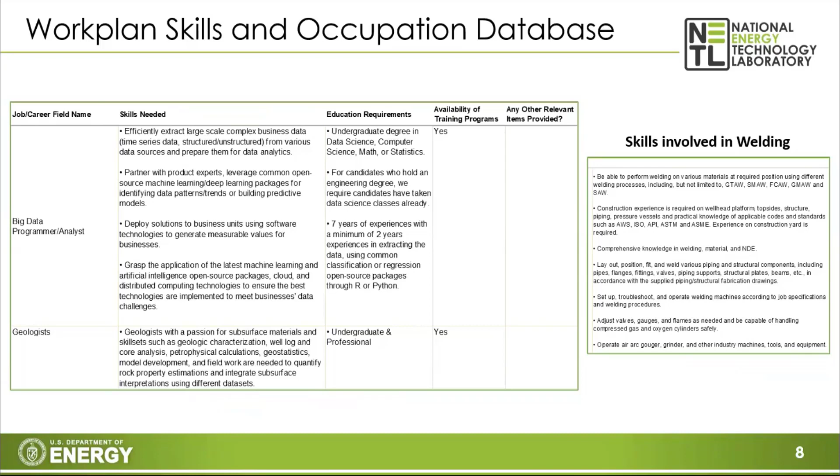Going forward, we think this type of work with this project across the labs could be really beneficial, especially for the academia sector, when you think of solar, wind, hydrogen. So we don't want to do this just from NETL—we would love to implement this across the labs. Once I can take this final technical report and start pitching this to all the different labs, I think this is something that would be like the next phase we'd like to try to implement across all the labs.

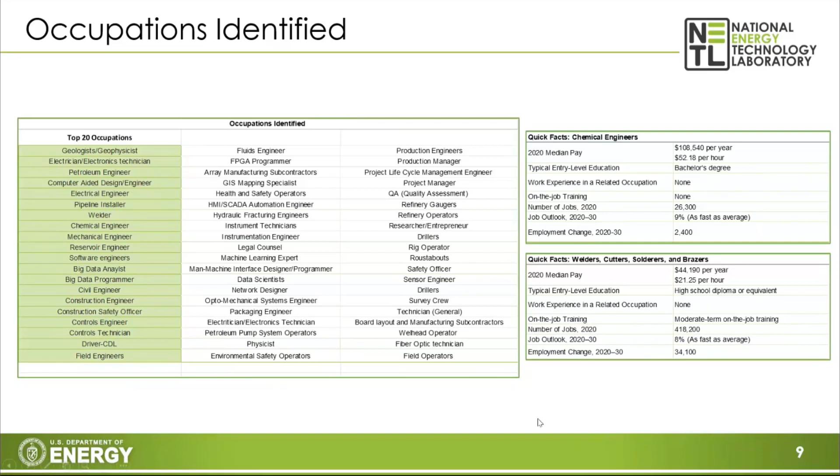The advanced skills are really something that's picking up. Construction industry, electricity generation, all of this type of thing, they're looking for advanced skills, and that's what we're finding from this pilot.

Next slide. So just to summarize, I want to pass it on here soon to Nate to get talking about hydrogen, but I'm really excited about this pilot we did because we're finding a lot of good information. Again, the skilled technical workforce is a big piece of the high-tech workforce in the future, not only now, but really in the next 3 to 5 years.

Technical workforce occupations are very in demand, and there's a misconception because they're pretty good paying jobs. We're seeing that when you look at all these Bureau of Labor Statistics numbers, when you go look at these skilled positions, 20, 30, 40 bucks an hour, good money out there for these. I don't know that a lot of the younger generation realizes that today. So that's really just the gist of it that I want to talk about.

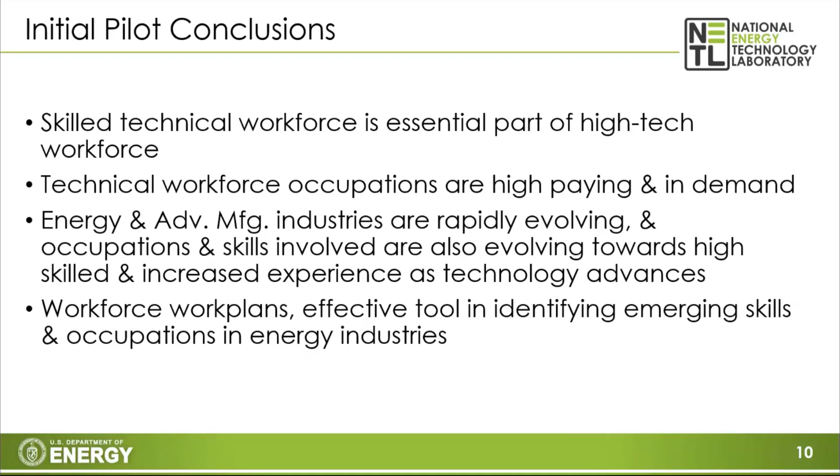All right, thanks Anthony for that great wrap around for Energy 101 and RWFI and the IWG. Again, my name's Nate Weiland, I'm Senior Fellow at NETL. As Anthony was discussing, NETL is both a research organization and also funds a lot of external research for folks. I sit on the research side of things, but I'm here to talk to you today about some of the basics of hydrogen, some of the research going on at NETL, and then I'll also talk about the various types of activities going on within the federal government surrounding hydrogen recently, hydrogen hubs, RFIs, etc. We'll get to talk about that towards the end here.

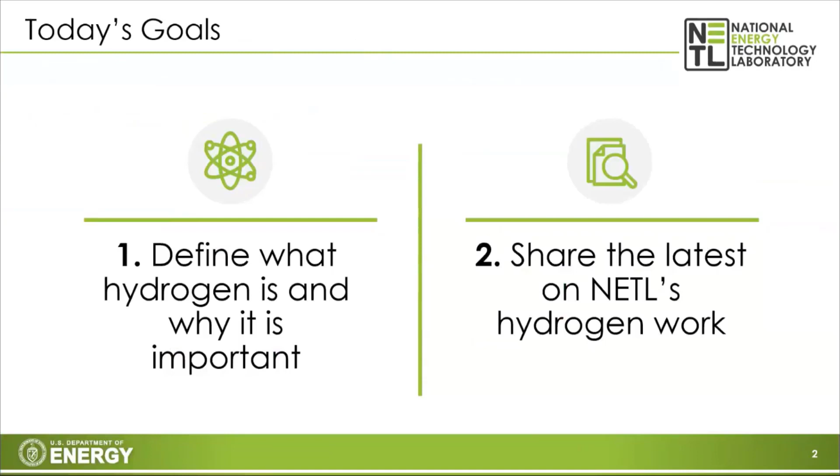So just to set the stage here with a quote from our Secretary of Energy, Granholm: 'We have the tools to put America on an irreversible path to achieve net zero carbon emissions by 2050.' For those who may have heard, the Biden administration has some very aggressive goals with regards to decarbonization. They're looking for a 50 to 52% reduction in economy-wide greenhouse gas pollution by 2030, and a carbon pollution-free electricity sector by 2035.

So not a lot of time to meet those goals. Included in that is addressing some environmental justice and job creation issues. We'll see that with some of the hydrogen hub and infrastructure bill actions that have been taken. And then kind of the ultimate goal is reaching a zero carbon economy by 2050.

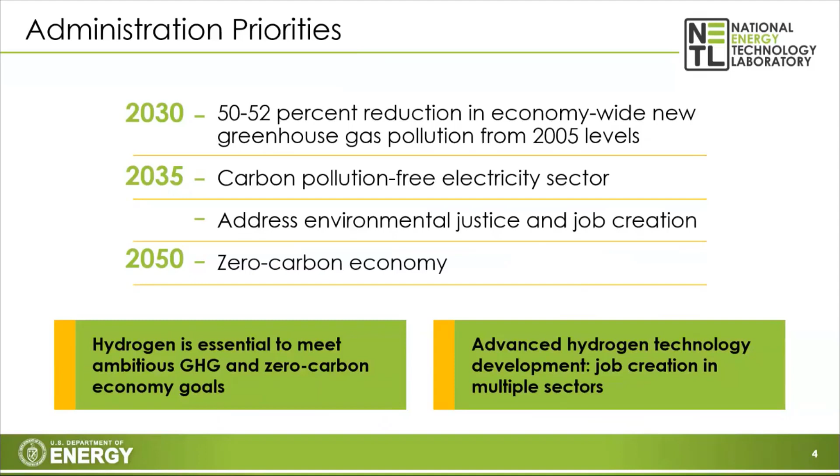Again, really aggressive. Would require an awful lot of infrastructure, an awful lot of new jobs and energy, which is why we're here today. So the hydrogen piece - hydrogen is essential to meeting some of those ambitious zero-carbon economy goals, in particular because it's very useful for decarbonizing some difficult to decarbonize sectors, and we'll get to that piece in a little bit as well.

We can, in particular, generate power again from that hydrogen. So as a way to offset, say, renewable power that's generated during the day, we generate hydrogen, and you can use that hydrogen to generate power at night or in the wintertime when we don't have as much wind or solar power. Hydrogen can be used in vehicles, can be used to help make synthetic fuels, help upgrade biomass

into oils and the like. It's also a primary component for fertilizer, ammonia in particular, which in itself is a carbon-free fuel. And we'll talk a little bit about that as well. Hydrogen can be used in metal refining and for other end uses.

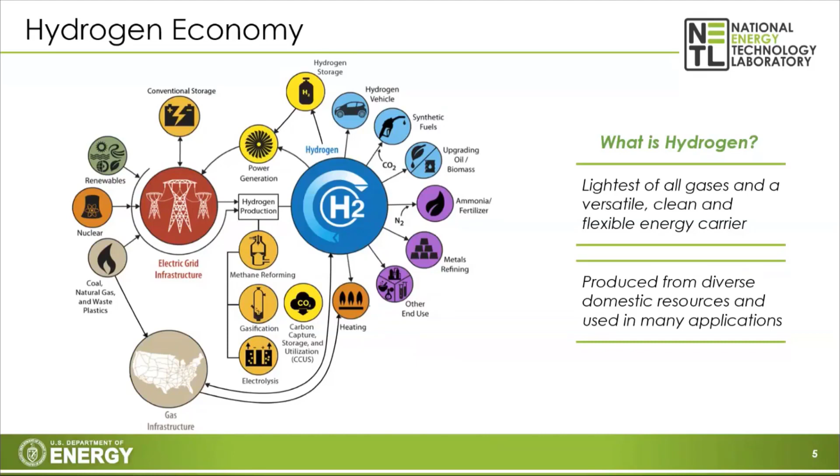And it's really kind of those blue and purple circles there that are where hydrogen is very useful in helping to decarbonize industries that really don't have a lot of alternatives for decarbonizing. So what is hydrogen? It's the lightest of all the gases, very versatile, very clean, and a flexible energy carrier, produced from a variety of domestic resources and usable as shown here in a lot of different applications.

So I'll note most of today's hydrogen comes from natural gas. It's about 75% of the world's hydrogen comes from natural gas currently. Most of the rest comes from gasification of coal, although a lot of that happens in China. But there are a lot of other options for generating hydrogen.

So solar and wind power to generate electricity certainly can use that electricity through an electrolysis process, essentially splitting water into hydrogen and oxygen to generate that hydrogen. Likewise, you can use nuclear power in much the same way, utilizing the electricity from nuclear power to generate hydrogen as well. There are a few other processes that are very specific in terms of geothermal or biomass-oriented processes to make hydrogen as well.

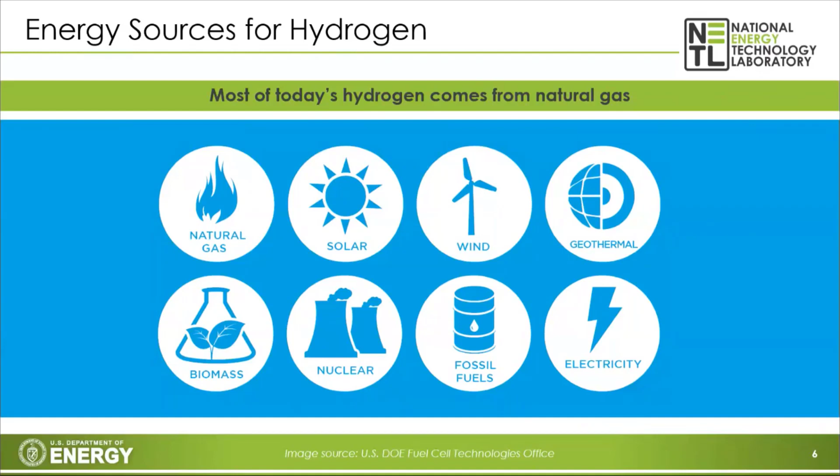So other options - I've already mentioned gasification, mostly a conversion of solid feedstocks like coal. We could also utilize biomass or even waste plastics to help generate hydrogen through a gasification process. And then, as I've mentioned, electrolysis processes again take electricity to split water into oxygen and hydrogen. I also mentioned direct solar water splitting, where that sunlight can be used to help heat water molecules and split it again into hydrogen and oxygen.

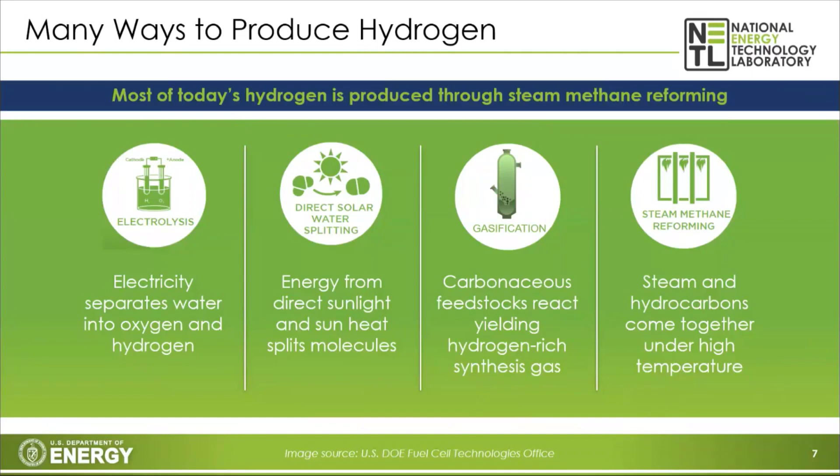So finally, I've already mentioned this can be used in a lot of different sectors. Fuel cell vehicles - there are a number of light duty electric vehicles running on hydrogen, primarily in California. I think the industry is recognizing that battery electric vehicles are probably a better fit or a better option for consumer or light duty electric vehicles. However, for heavy duty vehicles, hydrogen is a much better source because you're able to refuel much quicker rather than waiting for a battery to charge, for instance.

So in sectors like heavy duty trucking, rail, and even in some cases shipping or aviation, hydrogen might be a better fuel here. Hydrogen is good as an energy storage medium - as I mentioned, the sun doesn't always shine, the wind doesn't always blow, so you do need to store that energy. There are batteries for short duration storage currently, but hydrogen is looked at as a viable or very good option for long duration energy storage on the order of weeks to months.

So, I've already mentioned fuel cells. There's a lot of interest from cell towers, data centers, hospitals, supermarkets, people looking for backup power, where hydrogen fuel cells can provide not only a steady source of power, but a very reliable source of power.

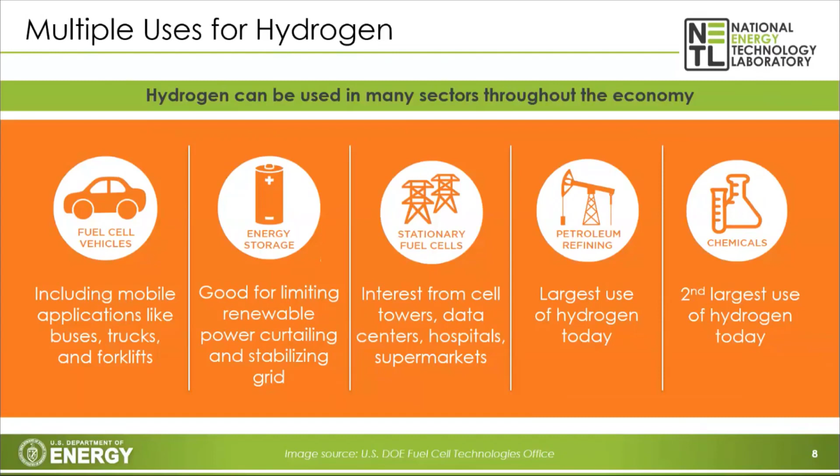Hydrogen is great, does a lot of different things, but it does have a couple of challenges that we need to overcome, and hence the need for a research program and a national strategy on how to fix that.

Energy density is one of its biggest challenges. On the left-hand side, you can see, on a unit weight basis, hydrogen's about 3 times more energy content by mass than gasoline, diesel, or even natural gas. However, it's a very, very light substance, so on a volume basis, it has about 4 times less energy content than gasoline. So if you're looking at a vehicle with a specific size tank to hold your fuel, you need a 4 times larger tank to carry the same amount of fuel energy utilizing hydrogen. So that is one of the primary challenges.

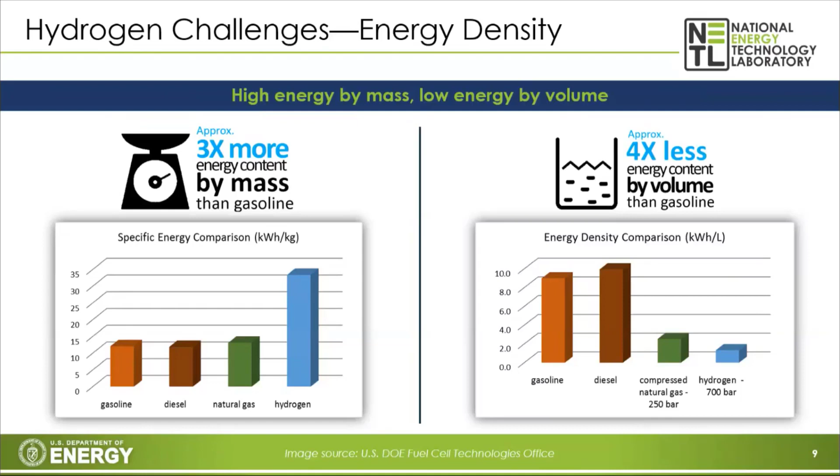Another big challenge is economics. Clean hydrogen is really expensive currently, but there are some research programs going on now to bring those costs down. We have natural gas and coal, which are really the primary production technologies for hydrogen right now. About 2% of the world's hydrogen is made from biomass and electrolysis from electricity produced through nuclear, solar, or wind processes. So not a lot right now, but certainly need to increase those numbers.

Hydrogen production costs, you can see on the right here. You'll notice SMR, steam methane reforming, which I've mentioned already, and I'll note as well the CCS is with or without carbon capture and storage. The main goal here is to decarbonize. In this case, you're taking methane, reacting that with water to generate hydrogen and carbon dioxide. That carbon dioxide is captured and stored typically in underground reservoirs, which tends to add a fair amount to the cost. So you're seeing costs here with and without carbon capture and storage, or CCS, for both SMR and coal gasification.

I'll note that this particular slide utilizes cost figures from Europe, where they tend to have higher natural gas costs than in the United States. Actually in the U.S., the top two, steam methane reforming, has a better hydrogen cost profile than coal gasification, with or without CCS.

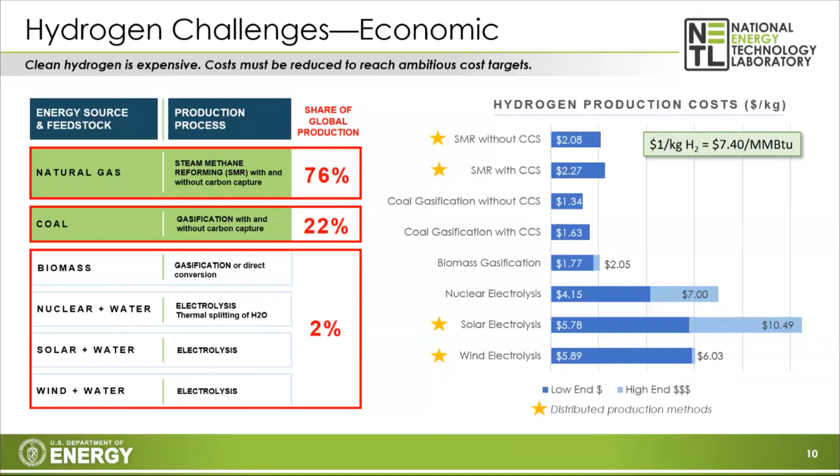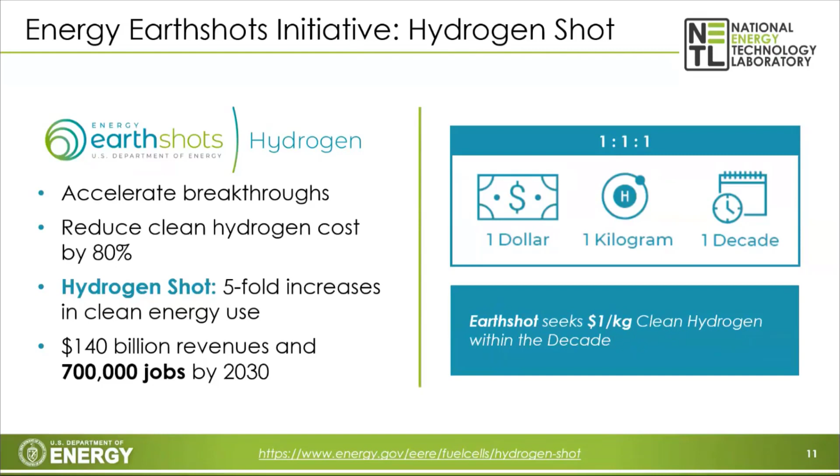The Department of Energy has started an Energy Earthshot, sort of like a take-off on the moonshot from the 60s to get us to the moon. The first Energy Earthshot was based on hydrogen, with the main goal being to produce $1 per kilogram clean hydrogen within one decade. That's going to require about a 5-fold increase in clean energy use and reduction in clean hydrogen costs by 80%, at least on the electrolyzer side. Cost reductions are lower for fossil fuel technologies, but still have a ways to go there as well. In reaching this goal, we're expecting about $140 billion in revenues to come out of the new hydrogen industry, with about 700,000 jobs created by 2030.

Another quote here from Jennifer Wilcox. She is the Acting Assistant Secretary for the U.S. Office of Fossil Energy and Carbon Management. Sourcing low carbon hydrogen will be critical to producing fuels and chemicals with CO2 as a feedstock, and there's potential for applying carbon capture to help advance a low cost and low carbon hydrogen economy.

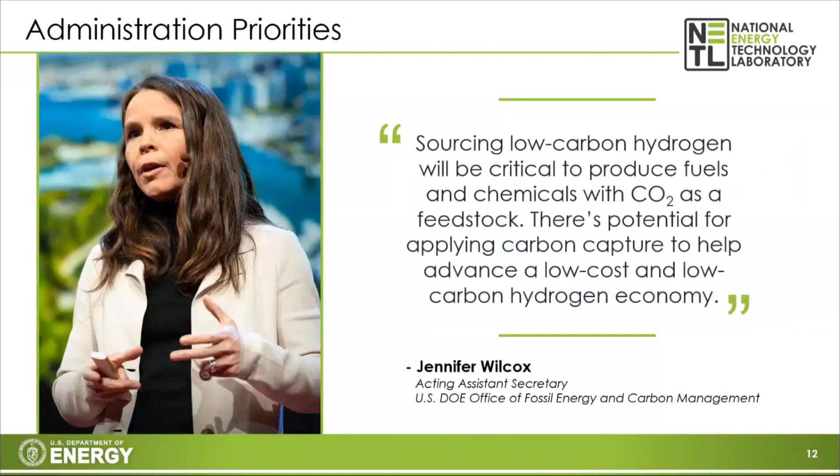So that's what we're doing at NETL. Our main role is working with the Office of Fossil Energy and Carbon Management, although we do work in some regards with other agencies as well. But being the primary fossil energy laboratory, it's kind of incumbent on us to enable this rapid and cost-effective transition to a hydrogen economy. As I've mentioned, we've already got many decades of research in carbon capture and storage, as well as a lot of work on fossil fuel large-scale production, infrastructure, power systems, et cetera. And of course, we do a lot of R&D to help on hydrogen, which I'll show in a minute, across the entirety of the hydrogen value chain.

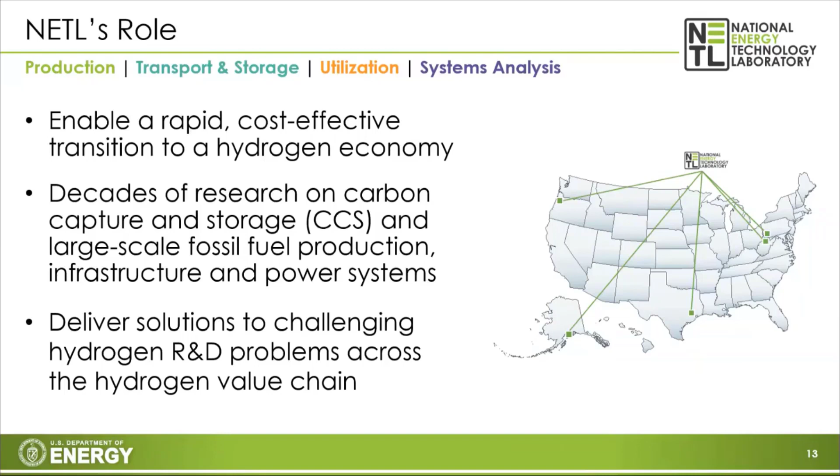There is another route that I'll talk about briefly: natural gas pyrolysis, essentially heating up natural gas in the absence of oxygen to create hydrogen and solid carbon co-products. Really interesting technology, which we're also working on. But once that hydrogen's produced, it really doesn't matter if it's blue or green—it's just where it comes from.

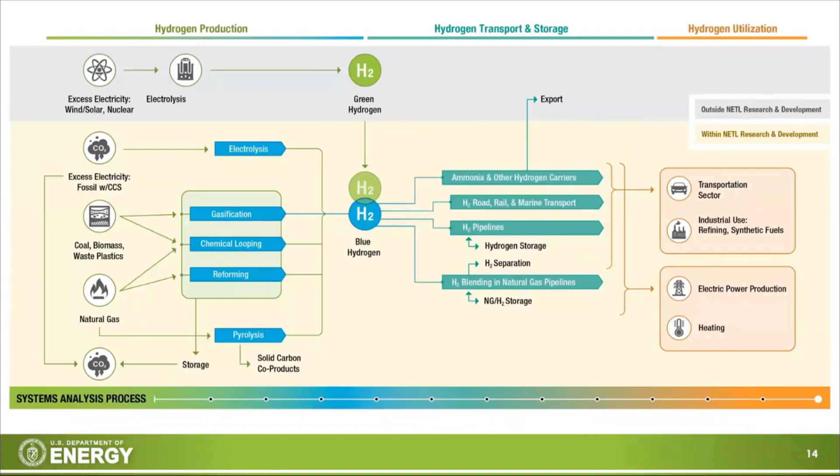One other item is you can take that hydrogen and convert it into ammonia or other hydrogen carriers to more easily transport it. Finally, whether that's in the form of ammonia, hydrogen, or a blended hydrogen and natural gas mixture, how do we utilize that hydrogen in the transport sector for industrial use, refining, making synthetic fuels, et cetera, power production, heating, et cetera? So I'll get into a little bit of our work in each of these segments in the coming slides.

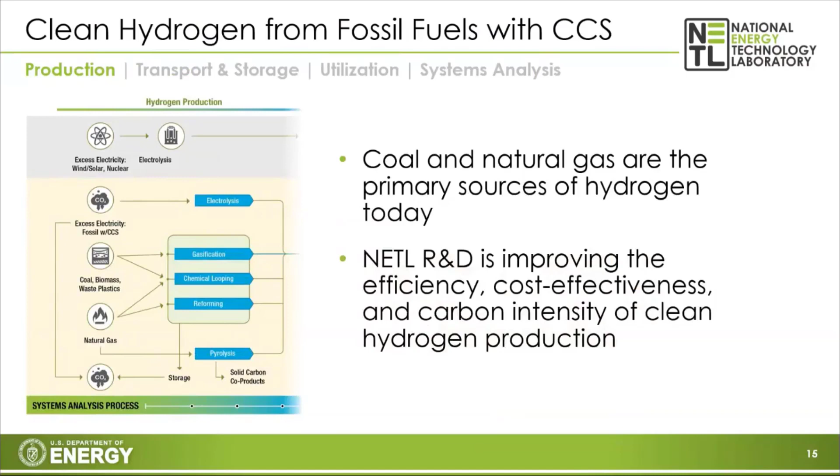So first, starting off with production. As I mentioned already, coal and natural gas are really our primary sources of hydrogen today, and the work that we do is really working on improving the efficiency and cost effectiveness of that clean hydrogen production, again trying to incorporate the carbon capture and storage pieces to reduce its carbon intensity. We're doing that in a number of ways. Just to give a couple of examples of the types of work we're doing at NETL in terms of research, we are looking at some advanced natural gas reforming technologies.

The one on the left actually utilizes microwaves to assist in that reforming process to move you from methane to hydrogen through a number of different routes.

I've mentioned already that electrolysis can be used. There are a couple of different types of electrolysis. Solid oxide electrolysis cells, or SOECs, are something we have a lot of expertise on within NETL, similar to a solid oxide fuel cell. They're higher temperature fuel cells and therefore more efficient electrolyzers than some of the lower temperature cells currently in production.

Note that we've also done a lot of work on multi-phase reforming and gasification with some inherent carbon capture systems. I mentioned the chemical looping systems already, and the methane pyrolysis for hydrogen and solid carbon co-products, where you can make nanofibers, nanotubes, nanosprings, graphene, carbon black that's used in rubber tires, and a lot of different things. So it avoids the need to make CO2 and then store that underground.

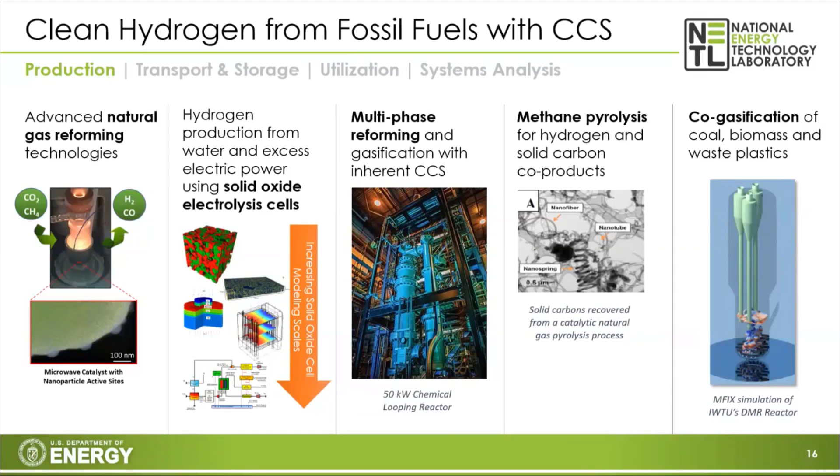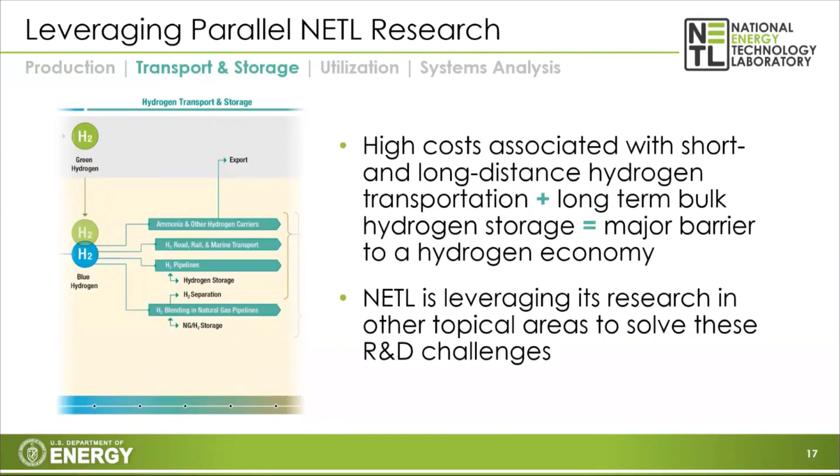I'll note that we're leveraging a lot of our parallel research in transport and storage aspects to improve hydrogen transportation costs. Transporting bulk hydrogen long distance really creates a major barrier to a hydrogen economy, because that's costly due to its low density. But because of our work in natural gas infrastructure, we're able to leverage some work to solve some of the R&D challenges there. I've mentioned the ammonia production already, as a potential hydrogen carrier.

We have a novel microwave-based ammonia production process. It's a really fabulous technology. It's a shift from the large-scale, high-temperature, high-pressure ammonia production plants to something done at atmospheric pressure with a microwave, so that can really help you modularize and shrink the size of that ammonia production process, such that it's usable at the base of a wind turbine or at a solar farm level.

We're also working on hydrogen carriers. There are a lot of different types of hydrogen carriers. On the slide shown here, we have some microporous carbons generated from coal, where the hydrogen penetrates into the pores of that coal structure, adsorbs onto the surface, and is used to improve the storage capacity for hydrogen transportation. We do a lot of fundamental materials research, not only for hydrogen material compatibility, but also materials for separations of, say, hydrogen and carbon dioxide.

Using some of those similar materials and technologies, a lot of that goes into sensors for real-time hydrogen safety, pipeline monitoring, and monitoring of plants, for instance. We have a suite of sensor technologies for that, which I won't get into today.

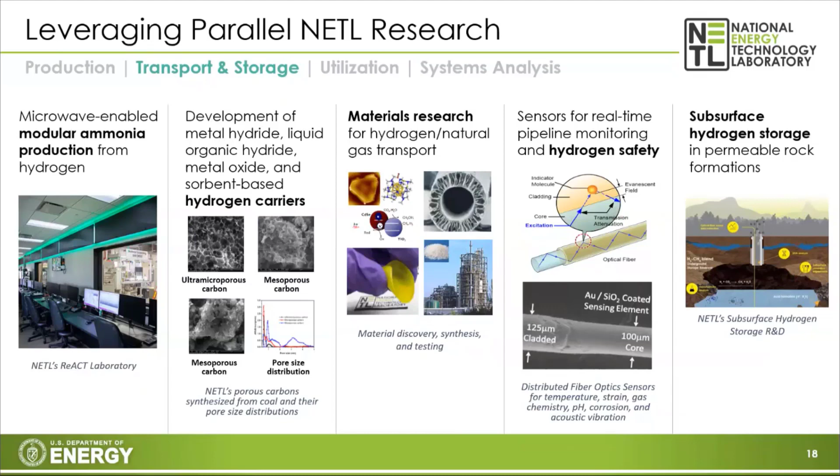As I mentioned, we're also working on subsurface hydrogen storage in permeable rock formations. Hydrogen is stored in underground salt caverns. Currently, there is a very limited supply of salt caverns around the country, so we are looking at other options, other geologic formations where you can store hydrogen throughout the country, to make that more ubiquitous throughout the U.S. and throughout the world.

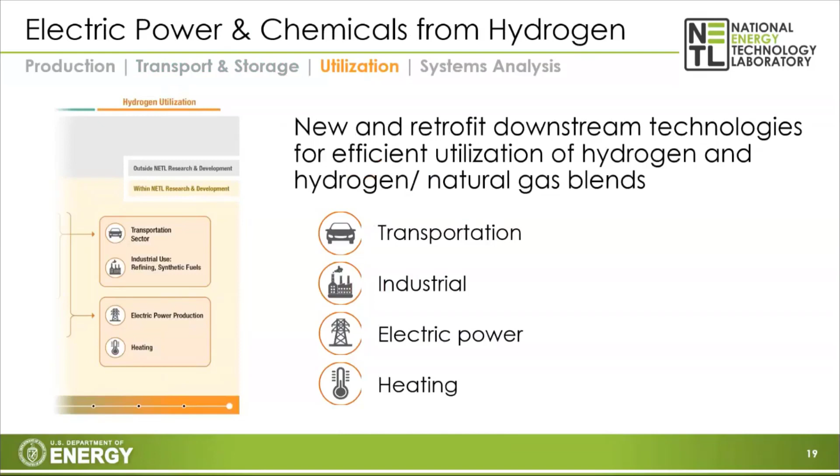In terms of end utilization, we need some new technologies. We also need some retrofit technologies to efficiently utilize that hydrogen and potentially hydrogen natural gas blends, if that's the form our hydrogen is coming in. We do a lot of work in hydrogen gas turbine combustion, in particular what happens to your combustor as you add hydrogen to the natural gas.

The second technology, rotating detonation combustion, is actually very interesting. It essentially utilizes the high reactivity of hydrogen to make a detonation that spins around in this annulus and creates a pressure gain that can be used to add power to a downstream turbine. So it is a way that...

Hydrogen can be used in a gas turbine and would also give you a power or efficiency increase. I've already mentioned some of our work in solid oxide fuel cells, which can utilize hydrogen to make power. We can also integrate those fuel cells with other systems, gas turbines, IC engines, et cetera, to make even more efficient systems, and figure out how to put those pieces together so that the controls work and we don't exceed the limitations of any specific piece of equipment. So a lot of work done at NETL on those pieces.

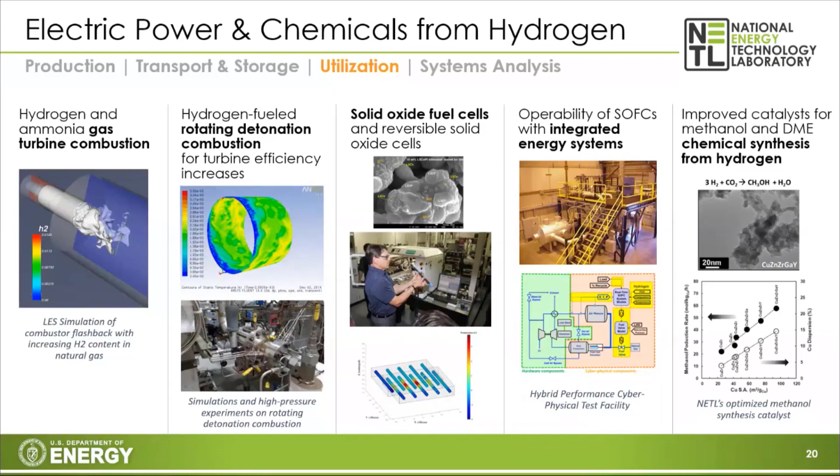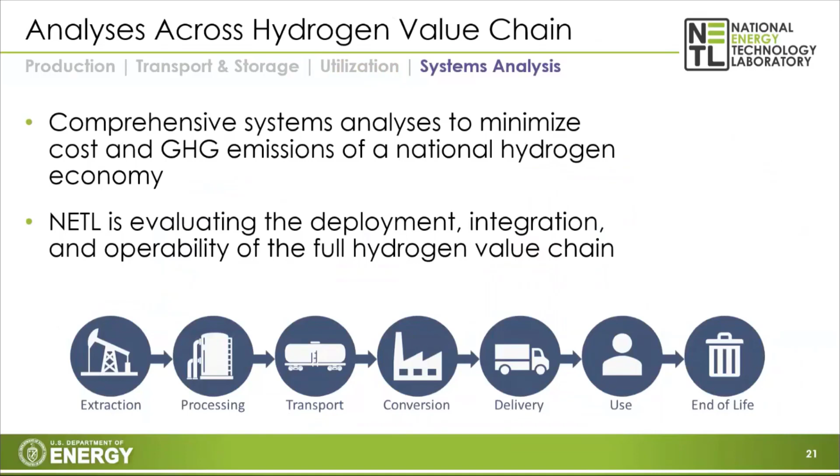And then finally, utilizing hydrogen as a feedstock for chemical synthesis, another piece of work that we do. We do a lot of work as well on systems analysis across the entirety of the hydrogen value chain. We're trying to minimize the cost, bring the cost of hydrogen down, also trying to reduce the greenhouse gas emission profile, reduce the carbon intensity of that hydrogen from a national perspective. So we look at that through the entirety of the hydrogen value chain.

So a lot of work on modeling, techno-economic analyses for the hydrogen production methods. I've mentioned as well the solid carbon co-production from methane pyrolysis, where we're looking at market assessments of the costs and utilization of some of those solid carbon products.

We have a study that's ongoing, should be coming out within the next month or two, on assessing a regional hydrogen infrastructure build out and job impacts. In particular, this particular study is on the Appalachian region. But we do have some similar studies going on in other regions of the country, like Four Corners, Arizona, New Mexico region, for instance.

The last one is, I would say, life cycle analyses, which is used to determine greenhouse gas emissions, which includes CO2, methane, et cetera, to sort out or reduce the carbon intensity of the hydrogen that's produced in this case.

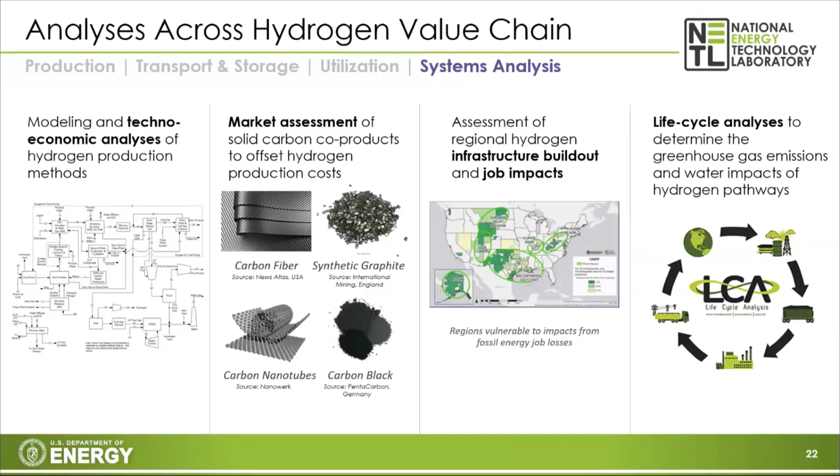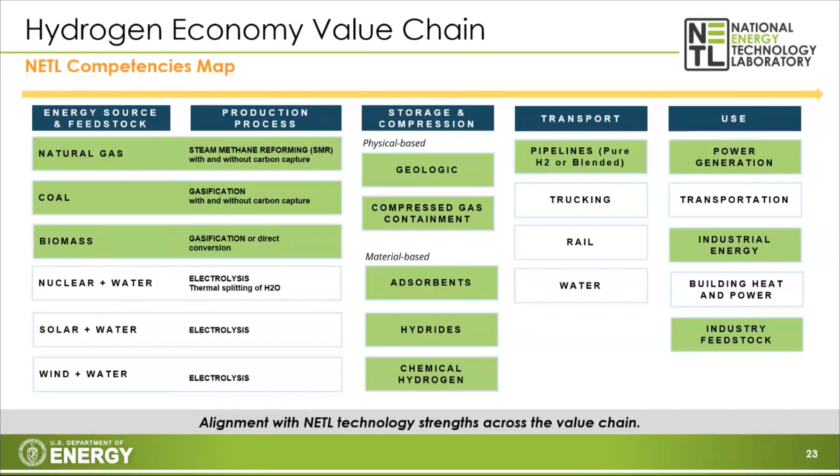We need jobs to help develop them. We need jobs for the engineering and design firms to advance the R&D on those technologies and get them ready for commercialization. And finally, once they're out into the marketplace, certainly need people for the construction of those plants and operation as well. So I'll get into that in just a moment here.

So, one thing I'll note, shifting gears a little bit from NETL to a larger DOE perspective: if we're trying to get hydrogen out into the national economy, how are we going to do that? So the Department of Energy put out a Hydrogen Energy Earthshot Initiative, RFI, or Request for Information,

looking to gather information on potential demonstrations, deployment projects, including spanning all pieces of the hydrogen value chain: production, infrastructure, end uses, etc. Got a lot of responses, I think 200 plus responses from all across the spectrum: industry, investors, academia, laboratories, other stakeholders, etc. But focusing on four main topics here.

So first, regional hydrogen production resources, infrastructure in various regions for producing and utilizing hydrogen. What are the end users in those various regions? And what is the greenhouse gas or pollutant emissions reduction potential of the technologies considered there?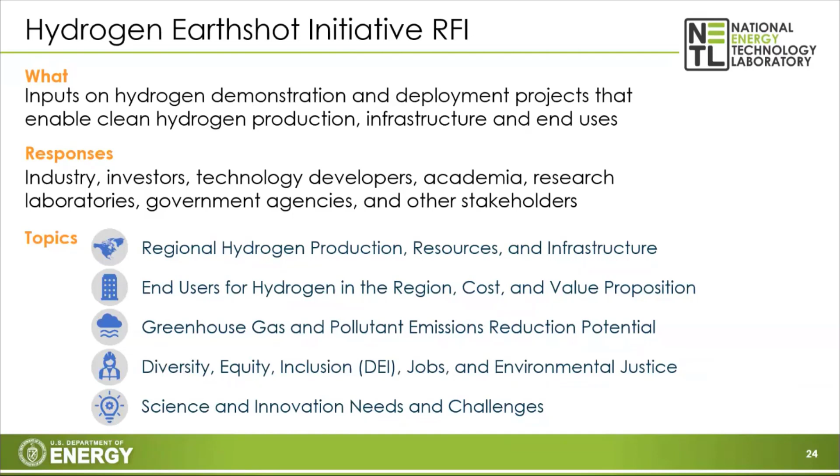There's a significant segment looking at diversity, equity, and inclusion, or DEI, jobs production, and environmental justice. And then looking again at the science and innovation needs and challenges.

So, as I mentioned, they received 200 responses or more from this RFI. There's sort of an overview of the things that were learned from this, and there's really opportunities to produce clean hydrogen all across the U.S., to really look at kind of showcasing the diversity of resources and industries, and even the communities that we have in our nation here. So just to select a few examples: California, currently very active in hydrogen, very diverse population,

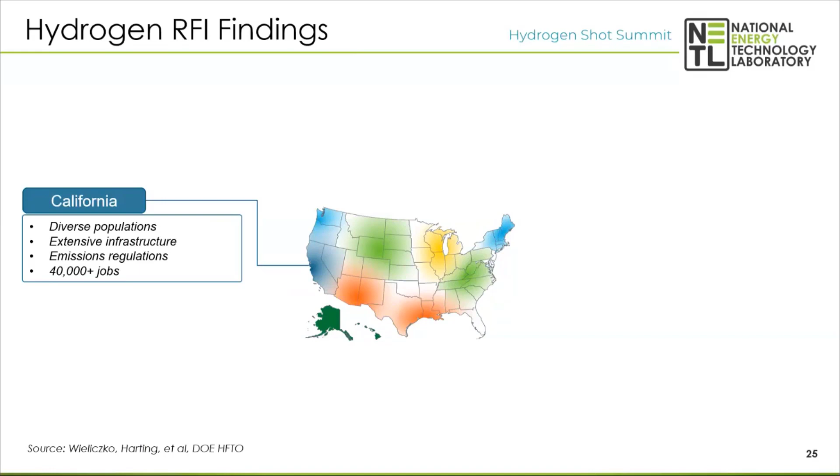but they also have a significant hydrogen vehicle program ongoing already. I'll say the Southwest and the Gulf Coast have a lot of solar resources. Mentioned already a lot of hydrogen utilization already in the Gulf Coast with the existing hydrogen pipeline, and certainly a chemical industry that could readily utilize that hydrogen.

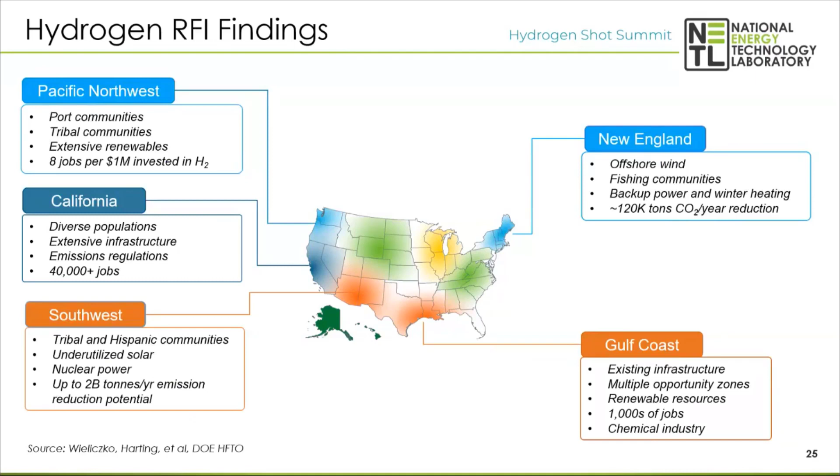In the Pacific Northwest and New England, a lot of potential for offshore wind to be used for hydrogen generation. There are smaller communities that could be utilizing that hydrogen. Tribal communities, Pacific Northwest in particular, fishing communities in New England, and a lot of workforce available there as well. So within the central U.S., I'd say the Great Lakes and Appalachian regions as well. Of course, a lot of fossil energy resources, nuclear energy, and a lot of other resources, and fabulous workforce for getting that implemented as well.

Finally, Alaska and Hawaii have, of course, very unique geographics and unique opportunities. Again, a lot of fossil resources in Alaska and a lot of solar and wind resources in Hawaii that can be used for hydrogen production and assistance with providing power for isolated communities in both cases.

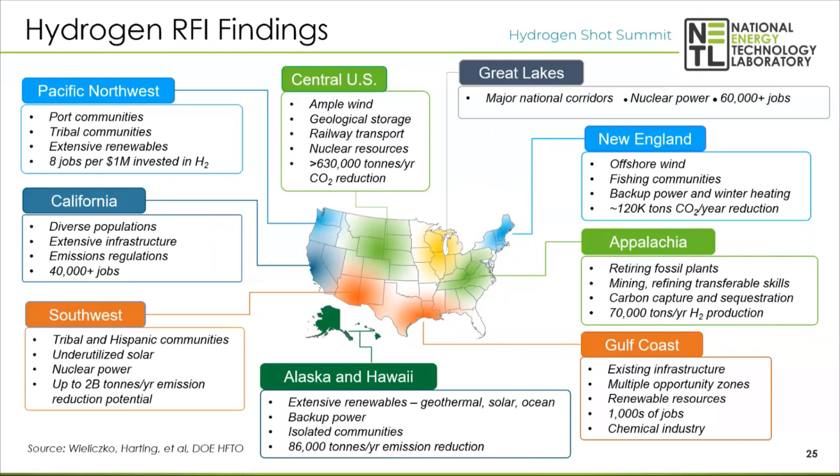Just want to focus quickly on Appalachia. We have a lot of great resources within Appalachia for generating a hydrogen hub. We have extensive fossil resources in the region, particularly natural gas, which would make a great resource for generating hydrogen. In addition, we have a lot of geology relevant to carbon capture. So transforming that natural gas into hydrogen, capturing the carbon, and storing it underground can all be readily done within the Appalachian region. Note there are a lot of distressed communities with high unemployment rates, in part due to reduction in coal utilization across the country. So a valuable workforce that can really help us accelerate any hydrogen economy within the Appalachian region.

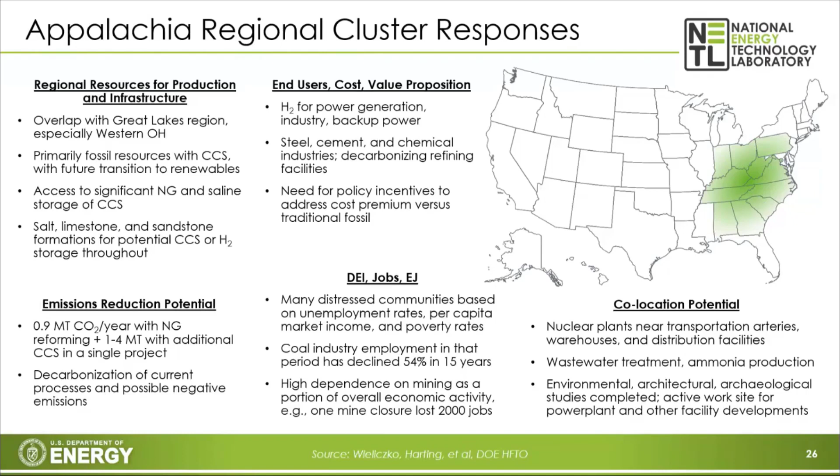The last thing I'll touch on here is our Bipartisan Infrastructure Law, or BIL for short. This was signed, I think, in mid-November, and includes almost $10 billion for clean hydrogen across the country. That includes about $8 billion for at least 4 regional clean hydrogen hubs, about $1 billion for electrolysis R&D, trying to drive the cost of electrolysis down to $2 per kilogram by 2026. There's also $500 million for a clean hydrogen technology manufacturing and recycling research program. So a lot of money to be pumped into the economy and local and regional economies to achieve these goals.

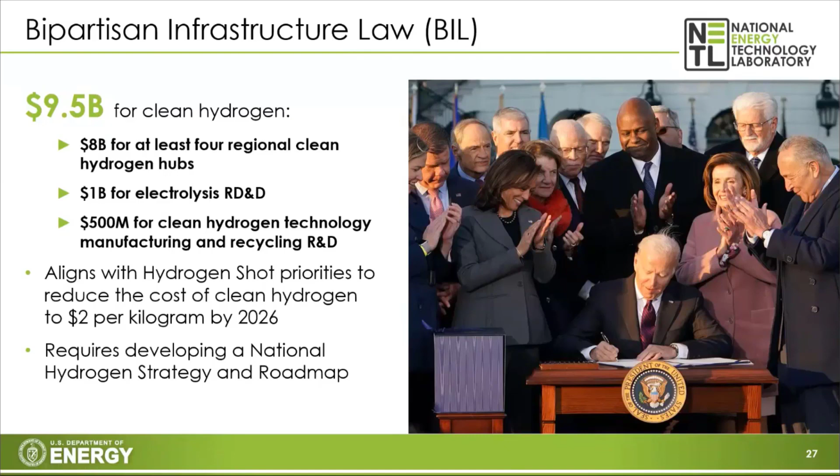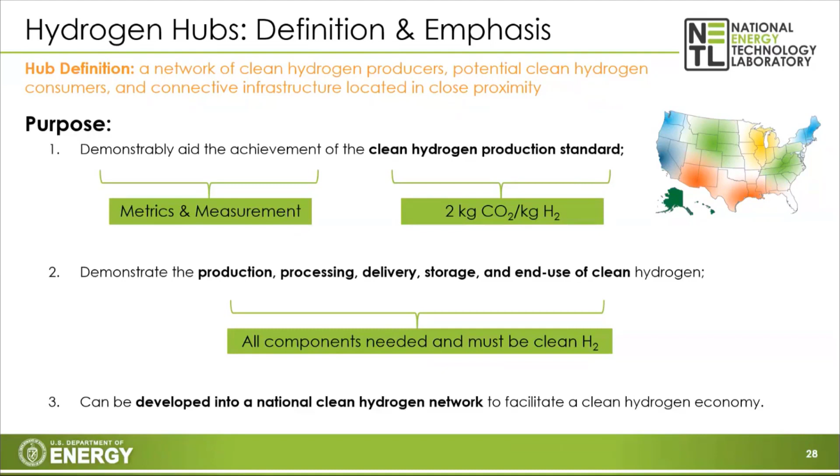So let's talk a bit more about the hydrogen hubs. What is a hydrogen hub? It's defined as a network of clean hydrogen producers, potential clean hydrogen consumers, and connective infrastructure located in close proximity. The purpose of these hubs is to aid in the achievement of clean hydrogen production. There's a standard set forth in the bill that hydrogen should attribute less than 2 kilograms of CO2 per kilogram of hydrogen to qualify as clean. You also need to demonstrate production, processing, delivery, storage, and use of clean hydrogen—essentially everything in the hydrogen value chain within that hub. The ultimate goal is to take the regional hydrogen hubs and eventually coalesce them into a national clean hydrogen network to facilitate a clean hydrogen economy.

Last thing I'll mention here are some of the criteria for hydrogen hub selections. There needs to be diversity in feedstock, so at least one hydrogen hub each focused on fossil fuel hydrogen production, hydrogen from renewable energy, and hydrogen from nuclear energy. At least one of each hub needs to look at hydrogen use in the electric power generation sector, the industrial sector, residential and commercial heating sector, and the transportation sector. So a lot of diversity in feedstocks, a lot of diversity in end uses, but also looking for geographic diversity, as we've seen in the previous couple of slides—a lot of different resources around the country where these can be utilized.

There is a provision to have at least 2 hubs in natural gas producing regions of the U.S. So Appalachia would be a prime example, Gulf Coast probably another. We have a couple other regions, say in the Wyoming, North Dakota areas, down through Oklahoma, Texas—a lot of other natural gas producing regions in the country as well. On employment, there's a provision to select hubs based in part on the opportunity to create skilled training and long-term employment for the greatest number of residents in the regions. So there should be a lot of money coming in to not only help build the hydrogen hubs, but create a workforce capable of sustaining that for the long term.

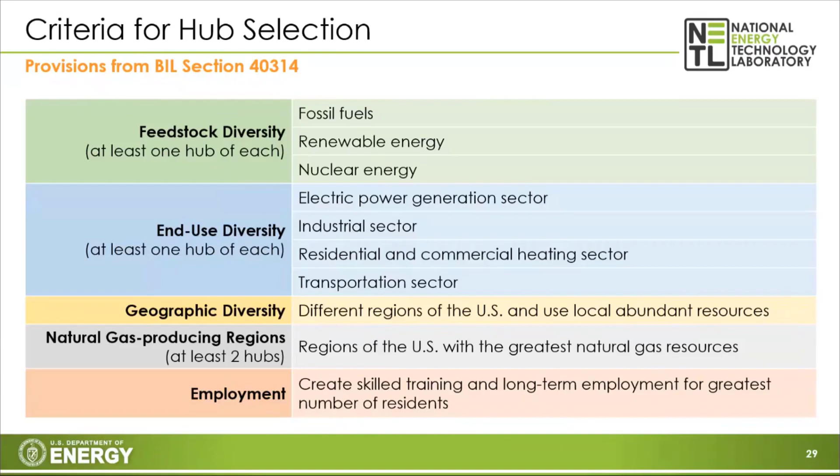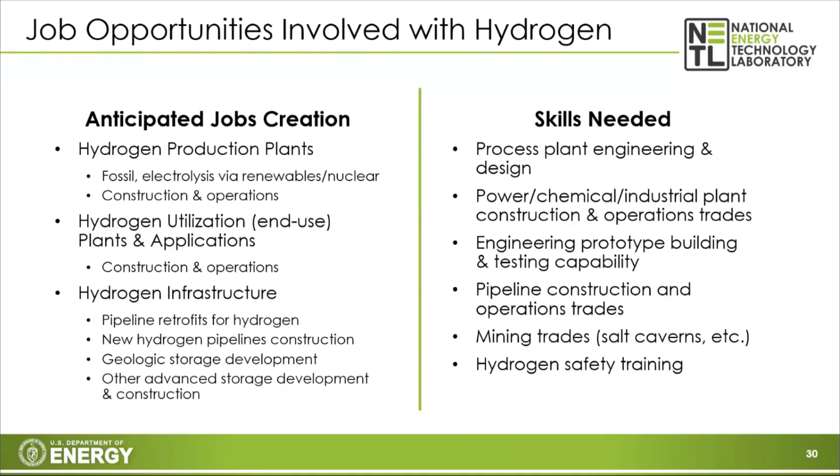Hydrogen is known as more explosive, it's more reactive than natural gas. So there are a lot of safety measures that need to be put in place as well. People that can provide and implement hydrogen safety measures, I think, are needed across all segments of the value chain, and are also going to be in high demand. So with that, I'll close the presentation and open things up for discussion.

Thanks, Nate. That's great. We usually have a little section at the end of these to talk a little bit about the workforce implications and economic development implications of the technologies and the main struggles with the technologies themselves. But you did a great job of including them in the presentation. So just let me see if I can move out from your presentation to our end slide.

I think you touched upon some of the workforce implications, but I did have one technical question. When you're working on this from the different feedstock perspectives, are there common research barriers that all of you are working on, like all the other labs working on hydrogen from the solar perspective or from the nuclear perspective? Are there common elements that you guys are working on together to try to solve, or are they very particular for each technology?

They're somewhat particular, I'll say. Pretty much everybody's working on all the downstream pieces, right? The hydrogen infrastructure, end uses, etc. But we do have more work specifically to us on the fossil-based hydrogen production. The electrolysis is fairly common amongst other laboratories. Ourselves, National Renewable Energy Laboratory, Idaho National Laboratory, all working on electrolysis, because you can utilize electricity produced from any production method—fossil-based, renewable-based, nuclear-based—with an electrolyzer to make hydrogen. So there are larger programs amongst the national laboratories to collaborate on the electrolysis piece.